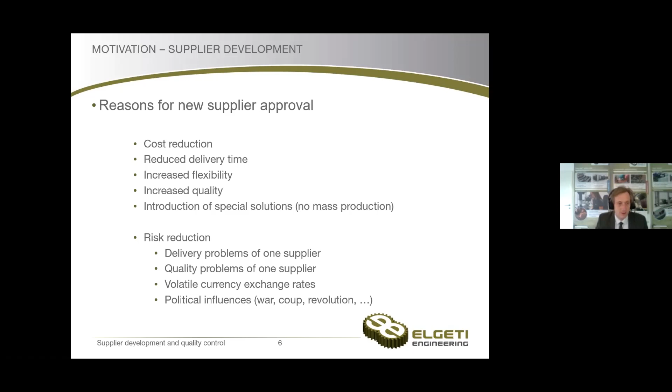Currency exchange rates, political influences, a war, a coup, a revolution, all these things can happen. And apart from that, certainly a pandemic can happen, which doesn't allow for international traveling, which will have impact on all your supply chains. And for such situations, you need other options, and this means you shall not be dependent on only one supplier for each particular part.

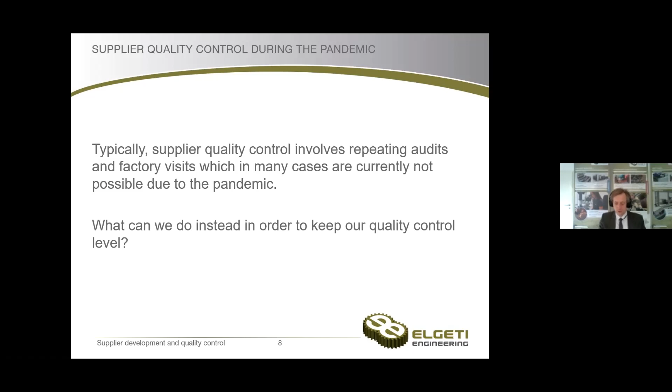So, supplier quality control during the pandemic. Typically supplier quality control involves repeating audits and factory visits, which in many cases are currently not possible due to the pandemic. And the question is, what can we do instead in order to keep our quality control level? Here I would like to refer to our standard recommendation, according to our seminar on the same topic. And here you can see how a quality concept could look like.

It has the three main items, which are supplier control, first sample inspection, and incoming inspection, and the regular supplier control for standard quality bearings. If you are sensitive for quality, prior to any approval, you shall visit them, and then once per year, more or less, audit them by a qualified auditor. Certainly this concept can be adapted to particular requirements, but this is more or less what it is about.

As Europeans, we currently cannot enter the United States of America, for example, and there are many more strict travel restrictions. But apart from that, even if there are no restrictions, even if you're allowed to, you're not supposed to. As we all know, pandemic spreads by contacts, and you better stay safe, stay at home.

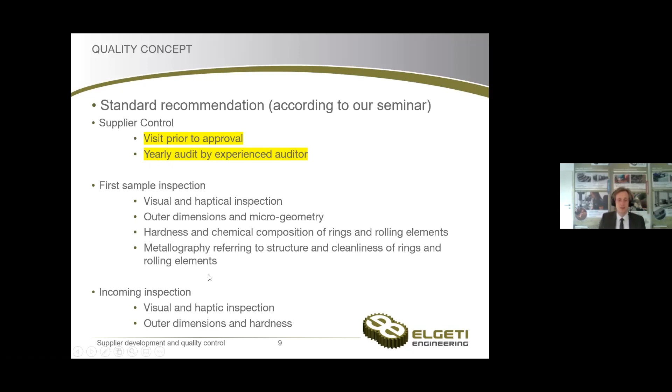And especially concerning incoming inspection, I would like to introduce the method of rapid testing. Rapid testing of bearings, endurance testing. Among all the testing strategies, which can refer to, let's say, verification of expected performance, or to A to B comparison of two different suppliers, this is quick and easy, quick and dirty. Not really dirty, but quick and therefore affordable, and that's the important point.

This is definitely insufficient for a total supplier approval, but it is something that can help you detect things. It can help you detect grinding burns, hardening cracks, if there would be the wrong material, even if the outer dimensions would be wrong, you would not be able to mount these bearings in your test rig. And so it can basically replace all the other inspection.

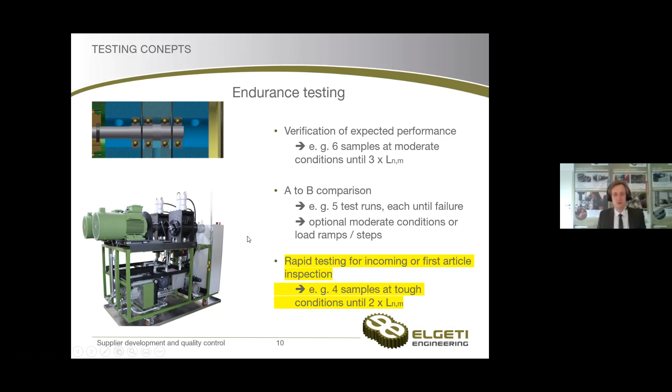And the same applies to your bearing quality control. If you check the dimensions, if you check the material, etc., then you can conclude everything is in tolerance, and therefore you assume that things shall be okay, but you don't have this final proof. On the other hand, if you do the integral test, do a test run, like the marathon runner, if they finish these 42.195 kilometers, they could impossibly have been that ill. And that's the idea behind this. If there would be no failure, then it can't be the worst part. The shipment should be okay.

So quality levels. Bearings are offered in various quality levels in the market, especially in trading business. And the question is, how can I decide which quality is suited to my application? And just for supporting this expression quality level a little bit, there are different understandings of this. Some people, when they think about bearing quality levels, think about particular brands. I don't want to mention their names here, but I think everyone knows whom I'm talking about, which are supposed to be premium brands, etc.

While some companies themselves, some factories, offer A level, B level, C level, etc. And especially in bearing trading business, and there the worst things happen, unfortunately, you will find companies that offer 5, 6, 7 different performance levels, with different prices, different brands on them, but all delivered by the same distributor, sourced from different factories. And the question is, what is this about?

And at the end of the day, you need to decide. And sometimes people do it that way: okay, I have a very challenging application. I need only the best of the best. I will take this particular brand, and nothing else. Full stop. And others say, okay, we can still consider other ones, which are also quite famous with a good reputation. And sometimes they say, I don't have that high requirements, don't have that high loads.

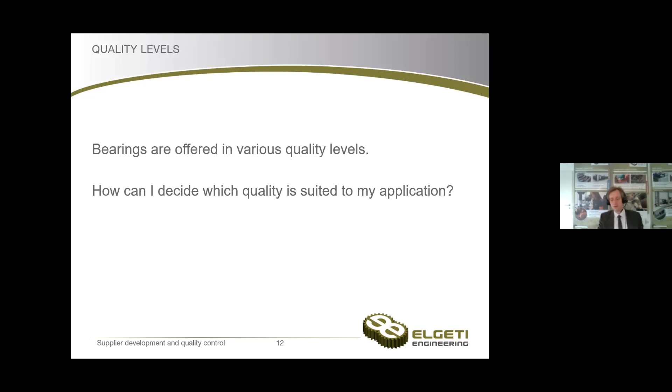And in this context, I would firstly like to define what is a standard quality. You can consider a premium quality as something superior. You can define something like almost standard, whatever you like. But before talking about this, let's first define what standard quality would mean. And by the way, the expression standard quality itself does not come from any standard. But my personal understanding is load rating can be calculated based on geometry according to ISO 76 and ISO 281, for example, or equivalent.

And this means the dimensioning and lifetime prediction of a particular bearing arrangement can be done according to these standards. If you do your lifetime calculation and you conclude 5,647 hours lifetime, this shall be true. You must be able to rely on that. That's standard quality. And these are the premises of the standards: hardness of minimum 58 Rockwell C, material cleanliness according to ISO 683 part 17, fine grinding of raceways, no super finishing.

And this is just a first remark. For example, this explains why we have something like a premium quality, something superior to standard quality. Actually, when the standard was published, super finishing already existed, but was not the general standard in production technology. Nowadays, especially for small size bearings, almost everyone does so. But still, the standards don't request this. Even without it, your lifetime calculation can be valid. And this means with super finishing, especially in mixed friction conditions, your bearings might possibly outperform the theoretical lifetime.

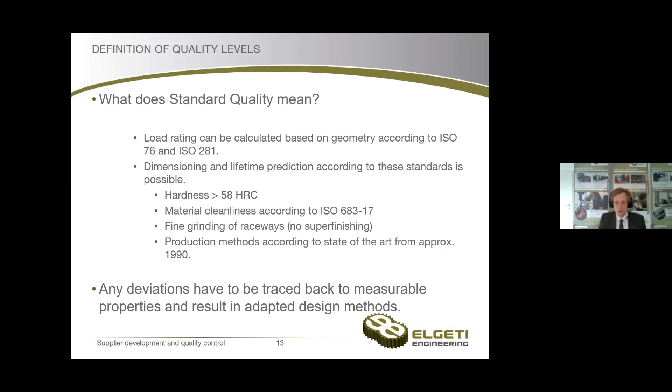The point is, if you calculate your bearing life according to ISO 281 with a certain safety in everything you're doing, standard quality would be exactly what you need. Premium quality, which is superior, outperforming this, would be nice to have, but you don't need it. And this is your room for optimization. But the details of this would be too much for this presentation.

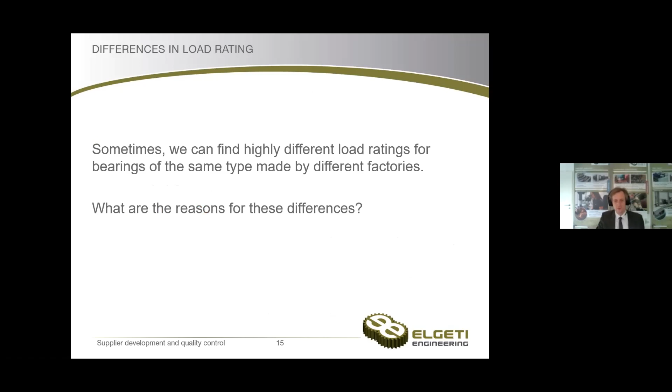Differences in load rating. Next topic. Sometimes we can find highly different load ratings for bearings of the same type made by different factories. So how shall we handle this? What are the reasons for these differences? Well, load rating can be calculated according to ISO 76 and ISO 281 only based on the geometry, especially using the following data: rolling element diameter, number of rolling elements, effective length of rollers, pitch diameter, pressure angle, etc. And certainly the related formulas refer to the assumptions mentioned before for the standard quality.

And the internal design of the bearings can be different. Accordingly, the load rating can be different. If you think about deep groove ball bearings, sometimes people make them with 8 balls. Others use 9 balls, while the ball diameter would be slightly less. There is no right or wrong. More rolling elements, in general, will lead to much smoother behavior, less vibration emissions. While on the other hand, if you only have few rolling elements, the bearing becomes less sensitive to particles, less sensitive to cylindricity deviations of the surrounding parts, etc.

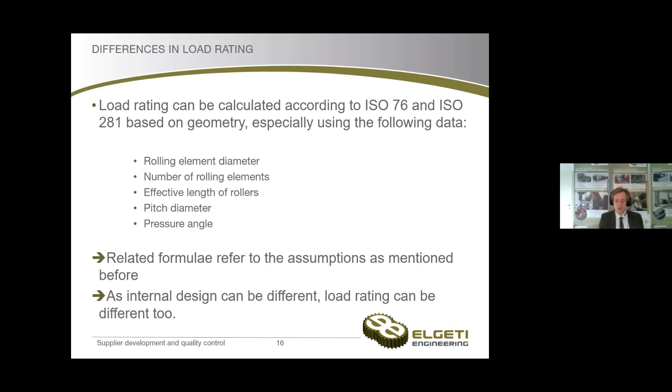So there is always a compromise between these two, and therefore there is no right or wrong, and this can lead to slightly different load ratings, and also cage design. Sometimes, if you think about cylindrical roller bearings, a cage just provides the space for one further roller, and this will lead to an accordingly higher load rating.

Alternatively, you can trace back your load rating to testing. This is also possible, as your load rating basically is a promise on performance. And therefore, some manufacturers just apply an additional factor and promise you 5% more or 10% more or whatsoever. Yes, and if they can justify this by testing, this is totally fine.

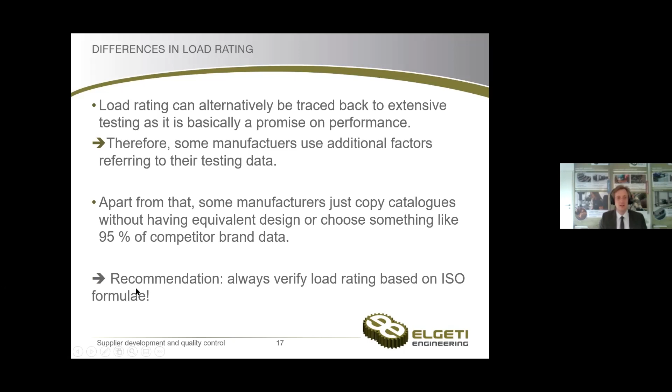Apart from that, some manufacturers just copy catalogs without having an equivalent design. Or what I also did see is some people just take 95% of competitor data and that's it, and they just don't think about it. And therefore, my recommendation is always verify load rating based on the ISO formula. Then you can identify any political influences. If you want to compare different suppliers, it is essential to compare them based on the same gauge.

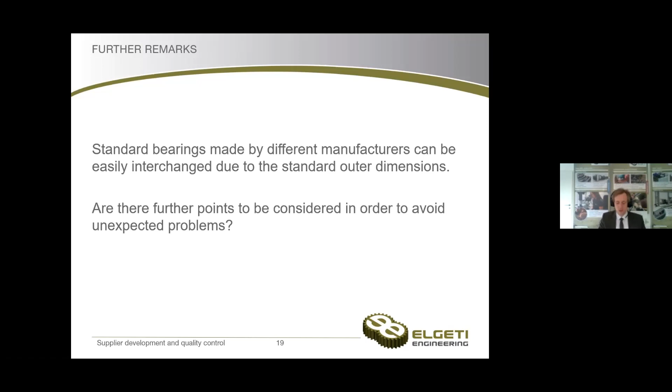Further remarks: standard bearings made by different manufacturers can be easily interchanged due to standard outer dimensions. That sounds simple. And the question is, are there further points to be considered in order to avoid unexpected problems? And I think this is the most important question of this presentation, and therefore I put it at the end. So I just would like to give you 5 points to think about.

Materials: sometimes we have case hardened bearings, sometimes through hardening. There are applications, especially when you face excessive shocks, where it can make a difference. If you just order a standard bearing according to standards, both are fine. The supplier can choose whatever suits them better, but you might possibly be sensitive without knowing it.

Interchangeability of rings is highly important. If you think about tapered roller bearings or cylindrical roller bearings, then typically it's possible to take one ring off the bearing and the other ring together with the rollers, and you can mix them up. It's possible, but you're not supposed to do this normally, because of the standard bearing dimensions. For example, for tapered roller bearings we're talking about the stack height, or for cylindrical roller bearings we're talking about the radial clearance. These refer to one complete bearing.

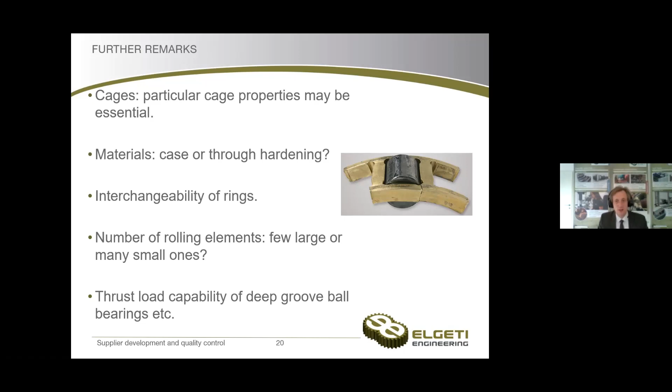And finally, thrust load capability of radial bearings, for example, deep groove ball bearings. Again, there is no standard for this. There's not even a standard for the thrust load capacity of cylindrical roller bearings, if you think about NUP or NJ bearings, but maybe in your application they need something. And what I would like to say with that: there are many details that can result in an optimized design from a cost point of view that can be a problem in your application. So if you want to approve a new supplier, be careful, and in case of doubt, you shall assume that there might be something else to be considered.

I would like to summarize this presentation. The reasons for supplier approval refer especially to costs, flexibility, quality, and risk management. Risk management is highly important, as these days show to everyone. Rapid testing can be a powerful alternative to audits during the pandemic, especially for small size bearings. The standard quality refers to standard calculation, both of load rating and also bearing life, bearing performance.

But everything else, if you have different levels, must be traced back to measurable properties and also to design approaches. This is highly important. Otherwise, your design would be unsafe. The difference in load rating can be based on different internal design or politics, just for some sales strategies, and you shall therefore verify in the best case, and lots of further details can be relevant and shall not be underestimated.